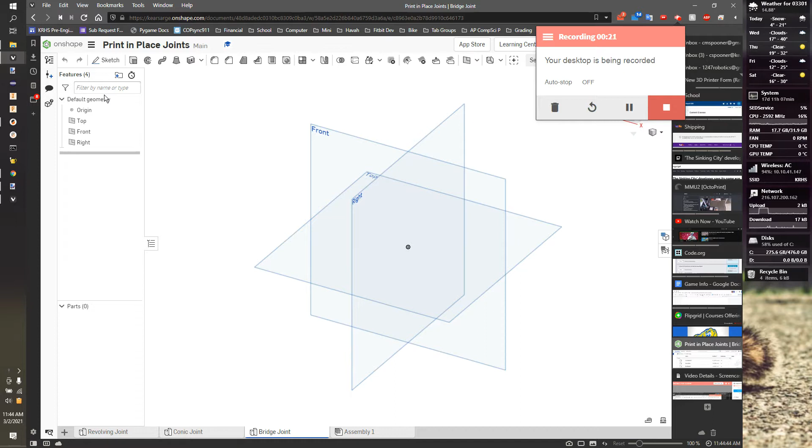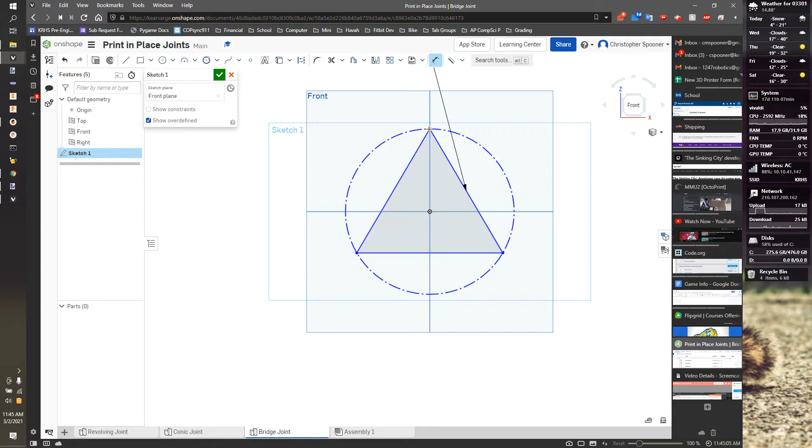So I'm going to start off with starting a sketch on my front. I'm going to look at that front and I'm going to use the polygon tool to make a triangle. And I'm going to dimension this thing from tip to toe. I don't like that tool, the triangle actually. I'm going to use our 3 lines.

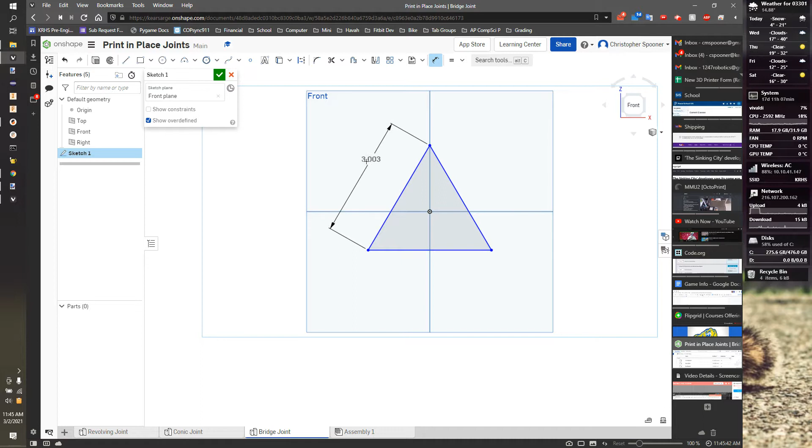And I'm going to force one of these horizontal, this bottom horizontal. I'm going to then set them all equal to each other. Now we've got a triangle. The advantage is my center point can be the center of the body of the triangle. So dimension from the tip of the thing to the bottom. Let's go 2 inches. And let's see how it wants to move. Oh, and I'm going to dimension from here to be 1 inch.

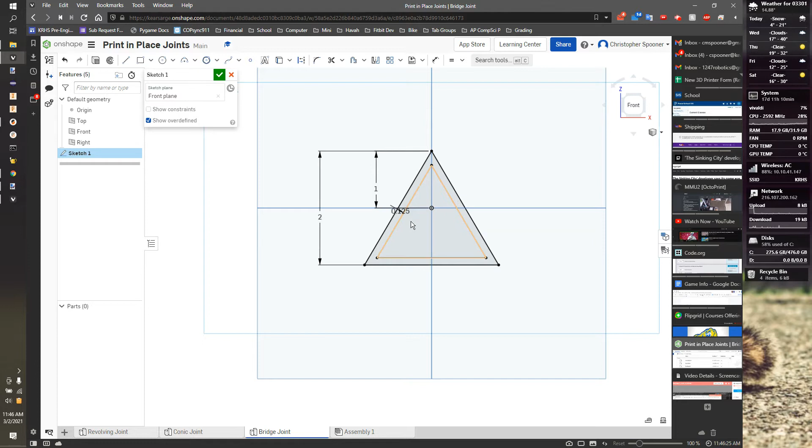I'm now going to use the offset tool to make a second. I'm going to select the whole thing to build the second one, and I'll dimension the gap between them to be 0.125. That looks good. And this looks okay. I'll still have to play with the center point of my circle, but we'll need to extrude this. We'll extrude it 0.1.

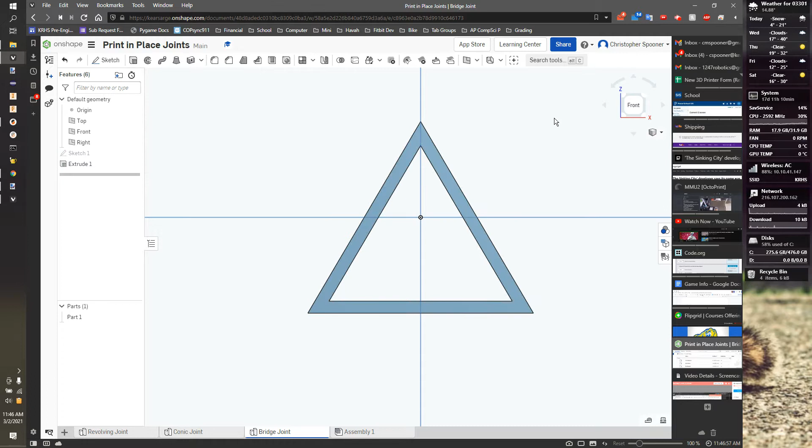And now we're going to start another sketch on, that extrusion, I actually want to make that to be a symmetrical extrusion. So instead of blind, click symmetric. That's going to make it so our front plane is in the middle of the shape of this object. Let's start another sketch on the front. And it's going to be our circle. We're going to do a circle inside of here.

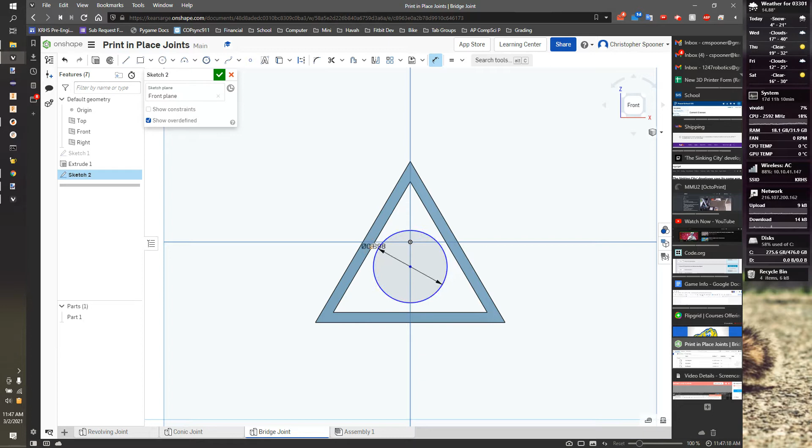And I'm going to dimension this circle offset from each of the 3 sides to make sure it's centered. I'm going to 0.07 or 0.05. I'm going to dimension from here to here to be also 0.05. And if I check this, it's 0.05 also. So our circle is nicely symmetrical. This is a driven dimension, but it just proves that we're good.

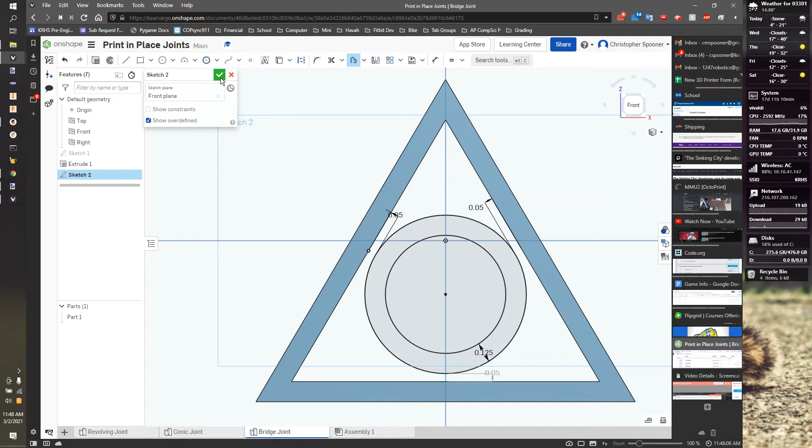I'll use offset now to draw a second circle. And I'm going to set that to be 0.125. And I'll Shift E for extrude. I'm going to pick symmetric again. 0.1. And now I'm going to connect these with an axle through the middle. And it's going to just bridge across the gap.

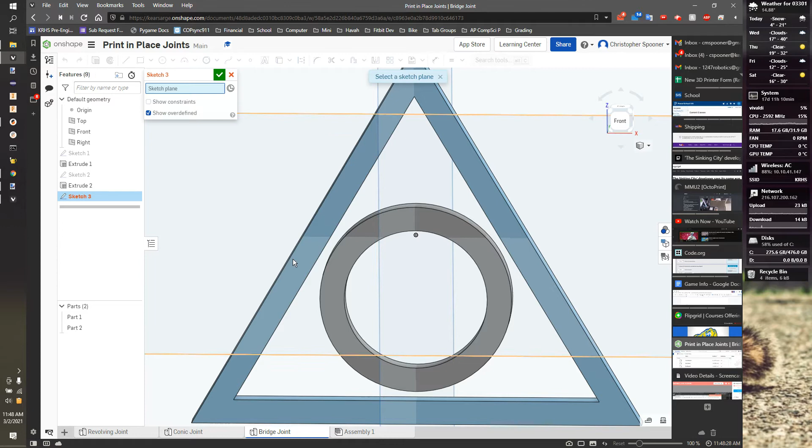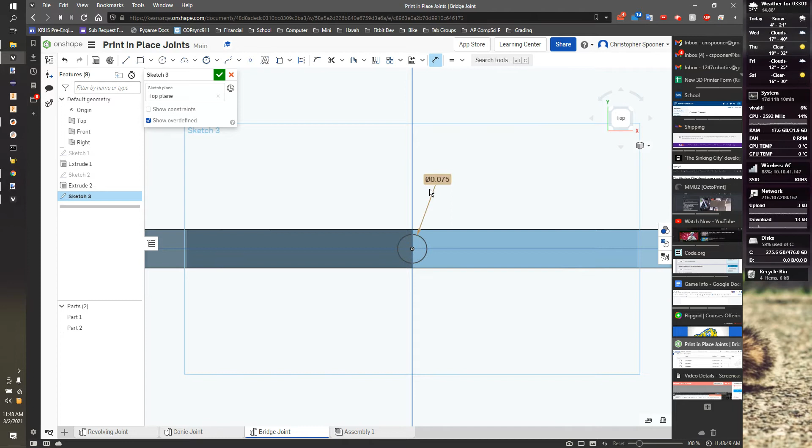So I'm going to start by putting a sketch on the surface. I'm going to draw a circle on the origin. I'm going to dimension this hole to be 0.075. And maybe a little smaller. Let's do 0.06. And we're going to take and remove. And we're going to go through to next.

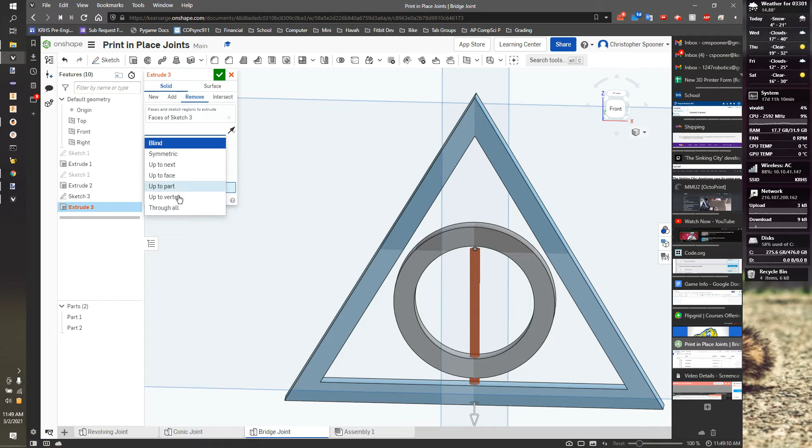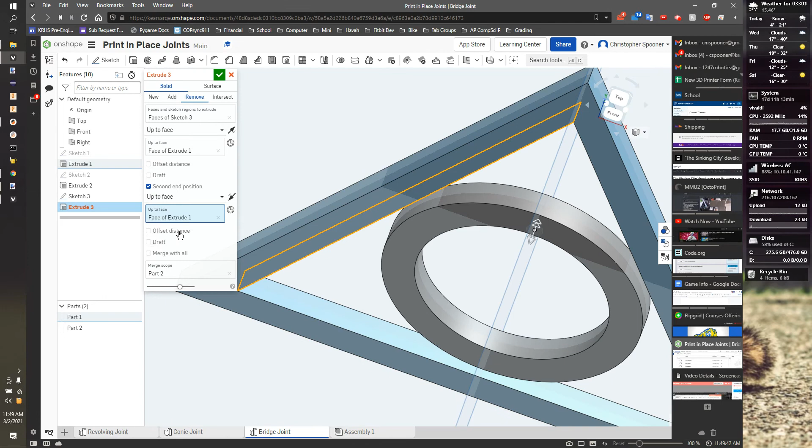Or sorry, we're going to pick up to face, and we're going to pick this face here. And we're going to pick second end position. And that should, nope, up to face. We'll just have to run this twice, remove once. I'm going to then take and turn on the viewability of the sketch.

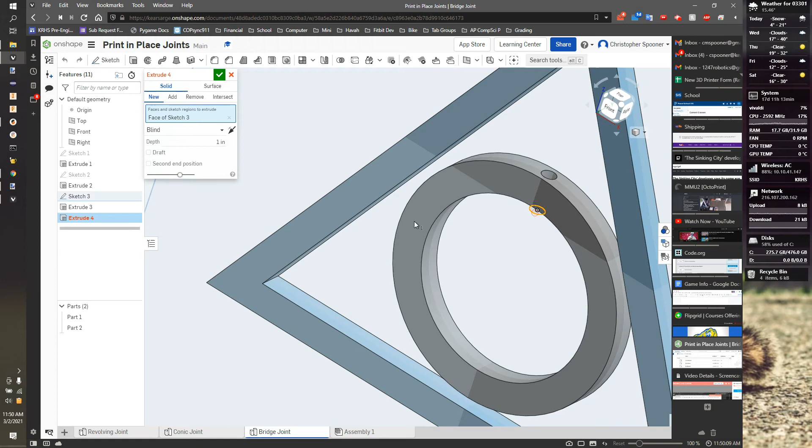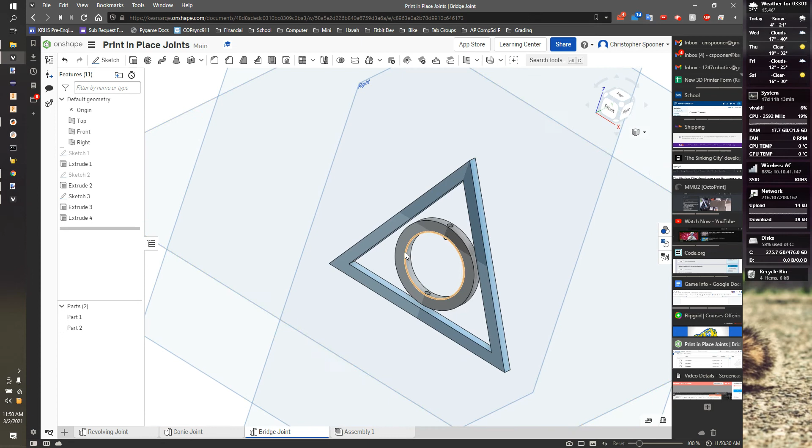And I'm going to extrude again. But we're going to go the other direction, say to face. Remove. Merge scope. This guy. So I removed an axle through the middle. There's probably better ways to do that. But now I'm going to start a sketch on the bottom of this guy. And I'm not going to tilt myself.

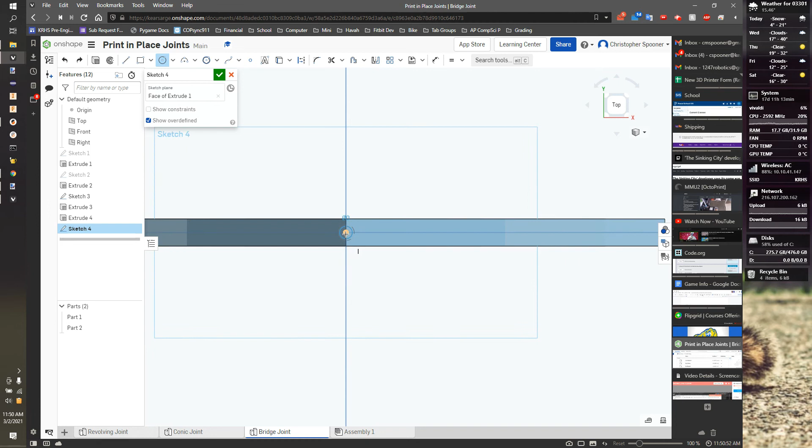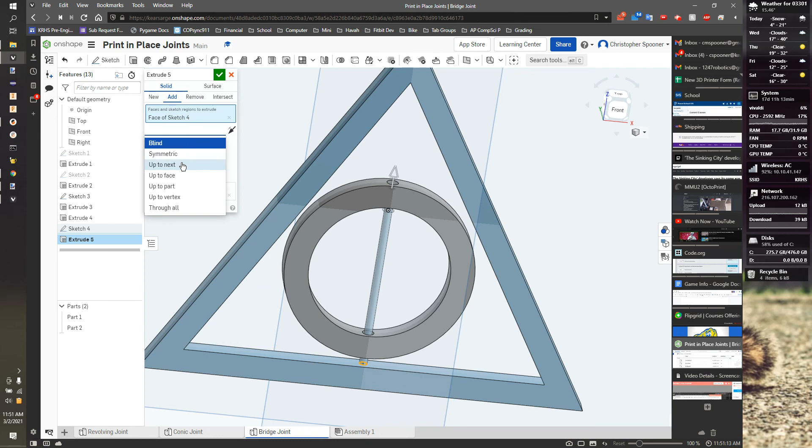I'm going to zoom in. Oh, actually, Control Z. I'm going to draw my circle using the origin again. And I'm going to dimension it from this circle to this circle. We're going to do 0.01. And we're going to extrude. We're going to say to next. So now our printer should be able to bridge that gap. We might have a little bit of cleanup to do, but now this will stay on there.

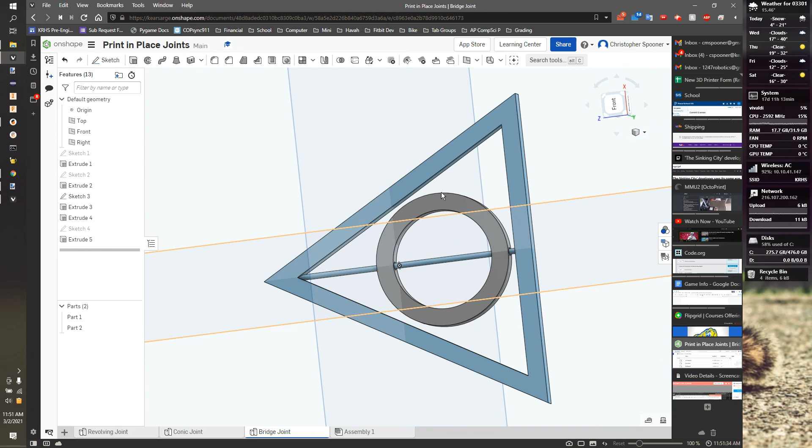We could also make some guides or make some revolve so this doesn't flop up and down. But generally, we now have a sort of Deathly Hallows symbol, and this circle should spin about the axle. But this bridge is a little precarious. We'll do some guess and check to get this dimension just so it doesn't bind, or you might use pliers to pull out a couple of droop strands.